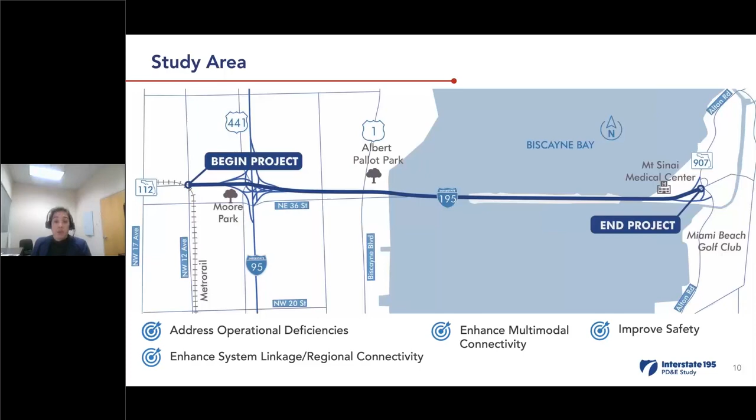In this slide, we showcase the study area. Our project runs along the Causeway, beginning on the west side at Northwest 12th Avenue, which belongs to the City of Miami, along I-195, ending at Alton Road, which belongs to the City of Miami Beach. In our project, we will be addressing operational deficiencies along the corridor, enhancing system linkage and multimodal and regional connectivity, as well as improving the overall safety of the corridor. Next slide.

So what is a PD&E study? A PD&E study is a project development and environmental study, which is a mix of engineering analysis, environmental analysis, and public involvement activities. This process is used by engineers and planners to determine the best location and conceptual design of the preferred improvements to the roadway. In a project as big as this one, we begin with the planning phase. Our planning phase finished back in 2020, and we began our PD&E study a little later, in June 2022. Moving forward, after the PD&E study, which is scheduled to finish by fall of 2025, we'll move into final design and engineering.

Moving then into the right-of-way acquisition, if it's needed, which most likely will be, moving into construction, and then maintaining the improvements in perpetuity. And there is always opportunities for public engagement throughout the PD&E phase.

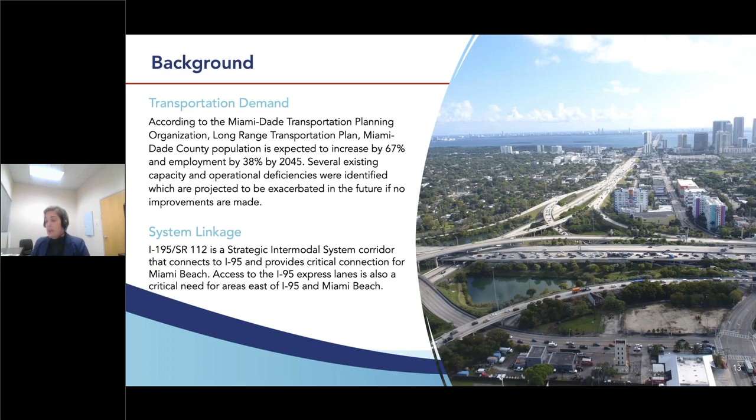As part of the safety analysis, there are several locations that have been identified within the high crash list within the corridor and multiple clusters of accidents. This indicates that there is a safety concern that we need to address.

There is also a lack of bicycle and pedestrian connectivity between both cities, City of Miami and City of Miami Beach, and we are evaluating opportunities to better these connections for the lack of bicycle and pedestrian infrastructure.

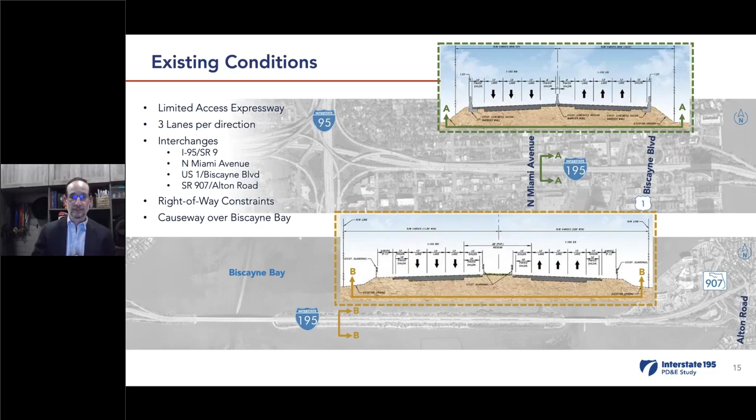Discussing a little bit further the safety issue that Yvette mentioned, within the analysis years of 2017 to 2021, there were almost 8,000 total crashes within our project study area, with a significant number of crashes concentrated within the I-95 interchange, as well as the US 1 interchange and Alton Road.

We've also highlighted the number of pedestrian and bicycle crashes associated along the corridor, as well as the overall fatal crashes that have taken place during that time. So from a vehicular standpoint, a lot of the safety issues stem from the poor operating conditions.

And then, of course, we need to look at all the ramp termini and those access points in terms of how we can better improve the pedestrian and bicycle safety associated with those locations.

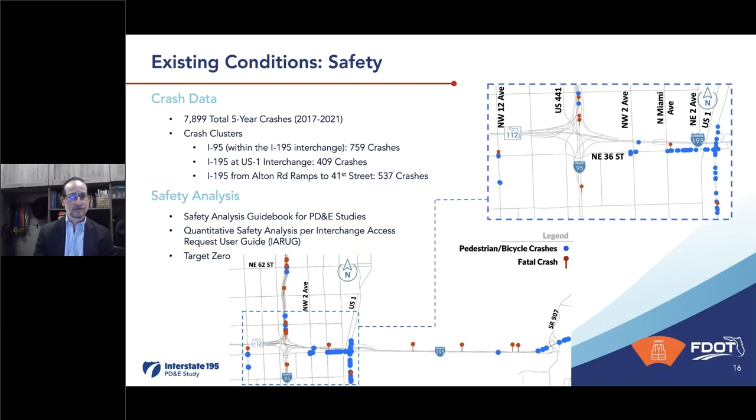From a traffic standpoint, currently there is already a high demand associated with this facility and poor operating conditions at a number of the interchanges. To help us detail this information and to help us in our analysis, we performed an extensive traffic data collection effort during the fall and winter of 2022.

Taking all that information and using Miami-Dade County's forecasting models to develop our design year traffic for the year 2050. That effort is currently ongoing, and we are looking in detail at not only the existing conditions, but what that looks like in the future, in the year 2050, without any improvements, as well as with some of the proposed build improvements that we're going to be discussing.

And we're going to look not only at the interstate and the associated interchanges, but also at the surface street operations. We understand that a lot of the issues that currently plague I-195 stem from the poor operating conditions on the surface street and how that then backs up to the interstate. So all that is part of our analysis as well.

And that will all be documented into our systems interchange modification report, which is a very comprehensive traffic document that is reviewed both locally in Tallahassee and also by the Federal Highway Administration.

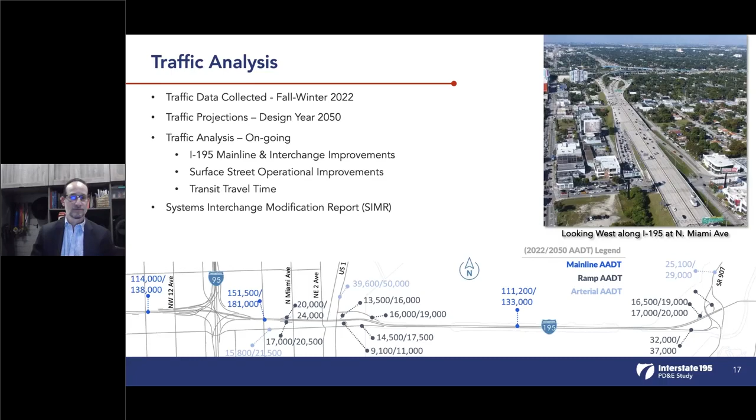As part of the process in a PD&E, once you understand what the needs are, then you look to develop alternatives to effectively address those needs. And the first step in that process is we always maintain a no build, and that is a scenario where no improvement takes place, and it really serves as a baseline by which we compare all of our build alternatives against. We also build into all of our alternatives what's called the Transportation Systems Management and Operations, or TSM&O.

These are options that include ITS, which is Intelligent Transportation Systems, and any neat technology that can be applied to the corridor to help improve the efficiency of the existing corridor without large capital expenditures. Then we also look at major build alternatives in order to adequately address the current and forecasted safety and traffic needs associated with the corridor.

We are looking at a number of build alternatives that have some system-wide implications, primarily being the need to connect the express lanes with I-195. Currently, there is no access from I-195 to the existing express lanes on I-95. This project looks to provide that connection to facilitate residents not only of this area of Miami, but of Miami Beach to have access to the express lanes.

We're also going to look at interchange improvements, not only with I-95, but at all the surface interchanges that I previously mentioned, Miami Avenue, Biscayne Boulevard, and Alton Road. We're going to look at the surface streets and see how some of these key intersections in and around the interstate can be improved. So we'll look to really provide one comprehensive solution for the corridor, and the need to look at multimodal enhancements. How can we partner with Miami-Dade County to make sure that we can help them deliver on their vision of transit for this corridor?

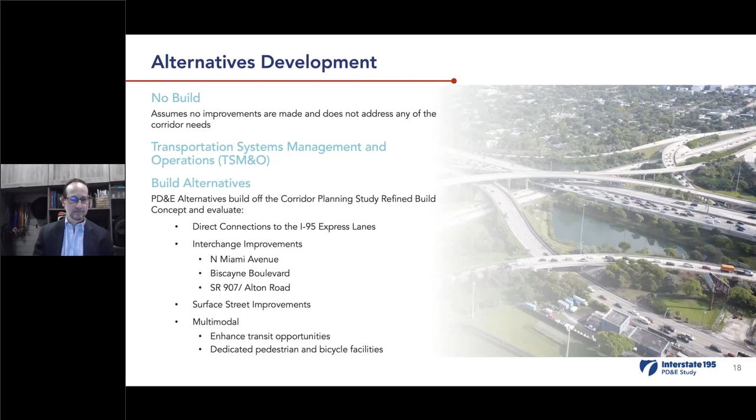There is a process to how we end up with our recommendation. And like I said, we start with these different levels of alternatives, the no build, the TSM&O, and these major build alternatives. We then develop conceptual alternatives in which we look at both system-wide concepts, such as the express lane connectivity, the transit enhancements, and the multimodal enhancements. And then we look at interchange-specific concepts to see what are the best alternatives that can be looked at for each of these specific locations.

We then combine those into what we call these system alternatives. And today we're going to be presenting two system-wide alternatives, Alternative 1 and Alternative 2, which Stefan will shortly go into greater detail on. Once we have our public meetings, this virtual meeting and then the in-person meeting, and take all of the input that we get from the community, we go back, we further our analysis, we take that feedback to refine our alternatives, and then we move forward with the preferred alternative that is presented at the public hearing before the culmination of the project.

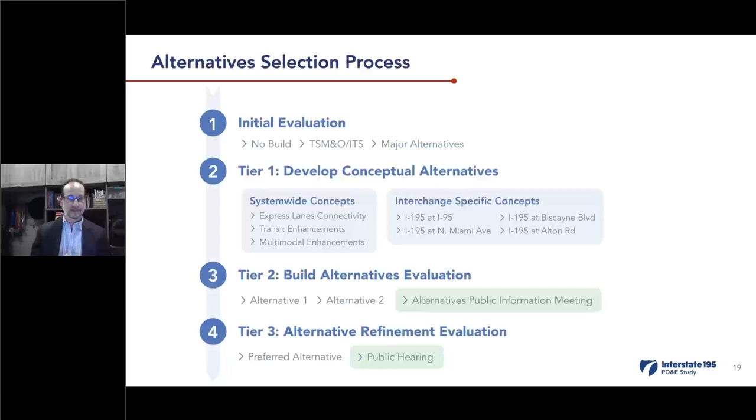In order to assist us to analyze the project and develop alternatives to address the needs that have been stated, we've segmented the project into 4 focus areas. Focus area number 1 is the area in and around the I-95, I-195 interchange. Focus area number 2, from the interchange to Biscayne Bay, which is the area with the Miami Avenue and Biscayne Boulevard ramps, within the city of Miami.

Then focus area number 3, which is the Causeway, which is the most delicate and sensitive from an environmental standpoint. And then focus area 4, the eastern terminus at Miami Beach, making sure of the connections to the beach, and we take into account improvements to make sure that the transition from the interstate to the surface street system is adequately handled.

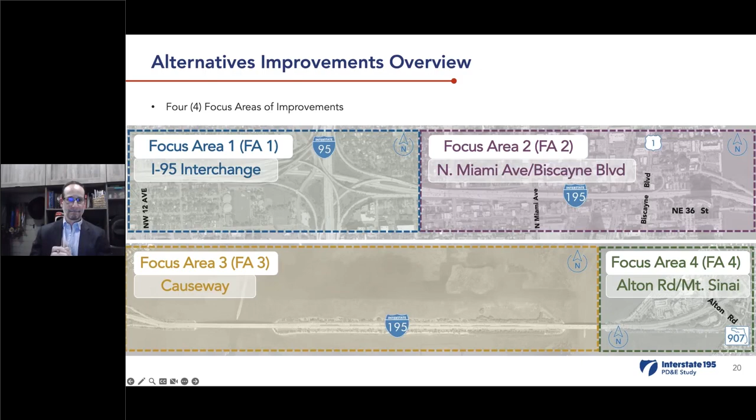Thank you, Robert. Beginning with focus areas 1 and 2, looking at an overall overview of the two alternatives currently being considered. You have alternative 1 on top and alternative 2 on the bottom. One of the key components for these two alternatives is the connection of I-195 with the I-95 express lanes, shown as the large black line cutting across the aerial image.

For alternative 1, a viaduct upper level is introduced along 195, which connects to the express lanes of I-95. In alternative 2, this access is further enhanced by also providing access to and from the express lanes with the local interchanges of North Miami Avenue and US 1.

Moving a little to the east, looking at the North Miami Avenue interchange under alternative 1: North Miami Avenue is upgraded from its current partial interchange, which only includes ramps to and from the west, to a full interchange, adding the eastern ramps—the westbound off-ramp and eastbound on-ramp. This full interchange also introduces a collector-distributor system between North Miami Avenue and US 1.

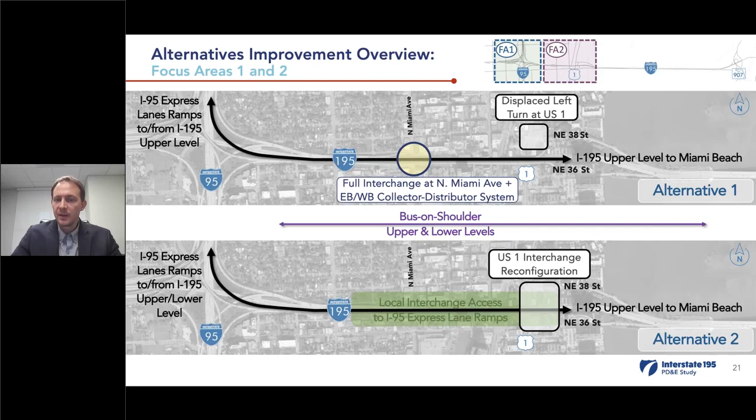Under alternative 2, North Miami Avenue remains a partial interchange. Moving to the Biscayne US 1 interchange under alternative 1, a displaced left turn intersection configuration is proposed for the US 1 and Northeast 38th Street intersection—we'll see more details on that shortly. Under alternative 2, the US 1 interchange is completely reconfigured.

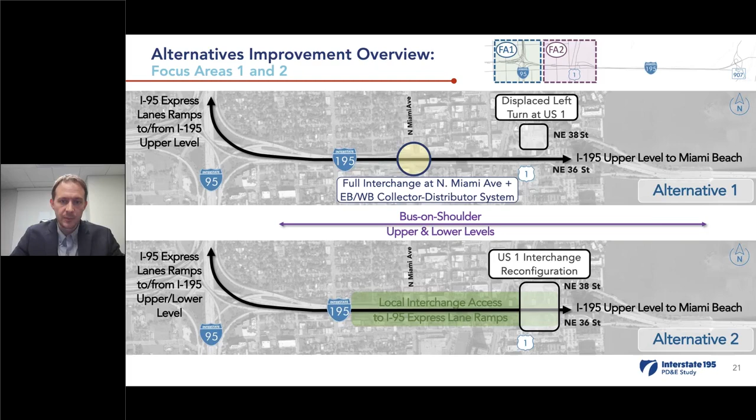Under both alternatives, bus on shoulder is proposed on both the upper and lower levels, and we'll see additional information on the next slide.

Looking at some details for focus area 1, the interchange with I-95 and its improvements. As mentioned, you can see on the typical section top right the two levels, with the viaduct upper level I-195 section. The key improvements under alternative 1 are providing ramp connections from this upper level system to I-95, connecting both to the express lanes and the general use lanes. In addition, bus on shoulder operations are introduced within this focus area.

They begin just east of the interchange and just west of Northwest 3rd Avenue. There's also an additional ramp, shown in the bottom right corner, providing access to the upper level for traffic coming from southbound I-95 and from northbound I-95 to the upper level. This allows traffic to bypass the interchanges of North Miami Avenue and US 1, continuing straight to the Causeway and Miami Beach.

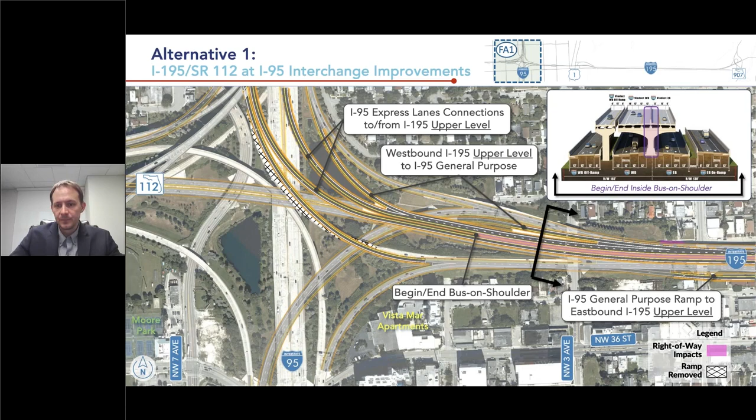Looking at alternative 2 for the same area, there are a few more ramps compared to the previous image, in order to provide additional connection and access from the express lane system to North Miami Avenue and US 1. As you can see, there are a number of ramps provided from the upper level and express lanes.

This also includes the beginning and end of the bus on shoulder, similar to alternative 1. All of the ramp movements from the lower level to the upper level occur within this interchange area, unlike the previous alternative, which had a ramp a little further east as previously described.

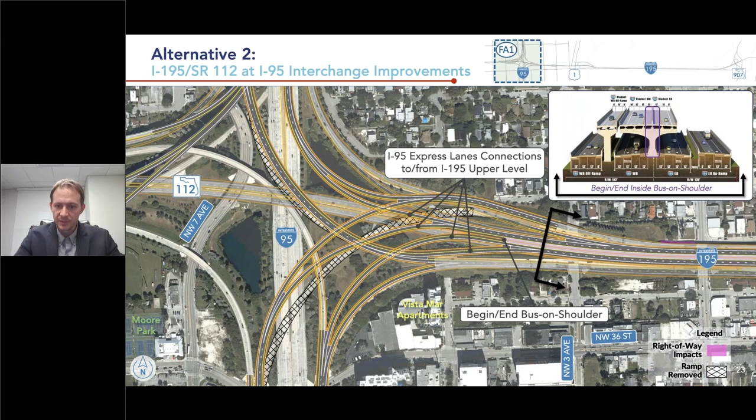Moving into North Miami Avenue for alternative 1 and the US 1 improvements. This alternative includes the full interchange with North Miami Avenue, adding the westbound off-ramp and eastbound on-ramp. To provide these ramps, a collector-distributor system is introduced between the interchanges of North Miami Avenue and US 1.

These collector and distributor systems process the traffic coming up—for example, westbound from US 1—and traffic also wanting to get off westbound at the new ramp at North Miami Avenue, allowing those lane changes and movements to occur outside of the main line where speeds are lower. This separates potential speed differentials, a key safety element for introducing the new ramps at North Miami Avenue. In addition, the US 1 interchange is improved by implementing a displaced left turn intersection, shown in the detail on the right side of the screen.

Beginning with the image furthest to the right, that shows the entire picture of the displaced left turn movement. It consists of taking the southbound left turn movements, crossing them over to the east side of Biscayne Boulevard so that they can then access the westbound on-ramp, operating concurrently with northbound and southbound traffic and saving on overall signal phasing time. So you have a detail here of that crossover intersection, which is further north around 42nd Street.

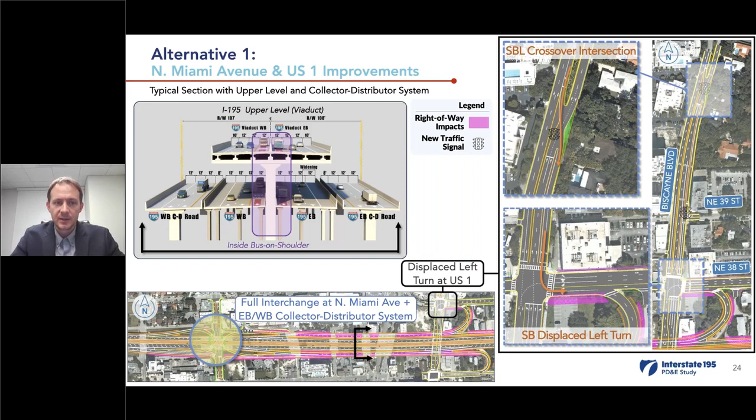As previously mentioned in the overview, the North Miami Avenue intersection remains as its existing partial interchange with only the ramps to and from the west. However, US 1 is reconfigured under alternative 2, beginning with the top left here of the slide, the new southbound Biscayne Boulevard direct ramp to westbound I-195 lower level. What this ramp does is it removes the significant southbound left traffic from the intersection with Northeast 38th Street and eliminates that conflict both operationally and safety, and from a safety and overall just high conflict of vehicles between northbound and southbound lefts.

The existing loop ramp from Northeast 38th Street is removed and relocated further east. This is in order to provide enough separation for the two ramps to be able to operate and still service the northbound to westbound movement. So as you can see, this is shifted further to the east.

In the bottom left corner, there's a loop ramp introduced from Northeast 36th Street to eastbound I-195. With this new ramp, the existing loop ramp is eliminated, again due to spacing of ramps along 195, and the eastbound off ramp to US 1 is instead introduced via what's called a Texas U-turn ramp. You can see in baby blue over to the right.

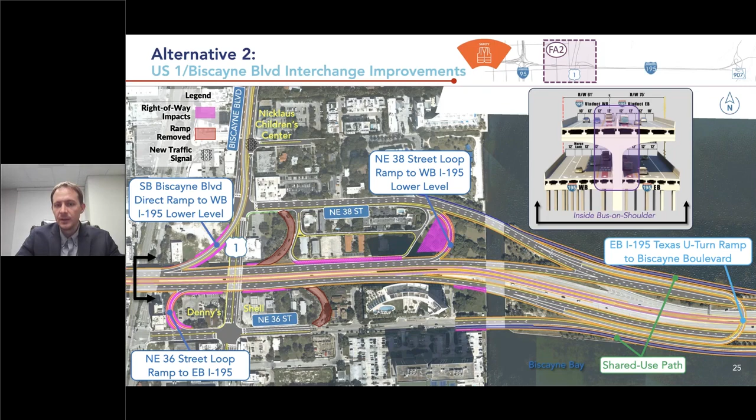Moving to the eastern side of the causeway into focus area 4, we have some safety improvements related to the westbound on-ramps. A lot of speed differentials exist today between traffic coming from Alton Road and traffic coming from 41st Street, where 41st Street has a little bit more time to begin speeding up compared to Alton Road, which is coming in at a slower speed and performing merge maneuvers. So this separates those two traffic flows to reduce the amount of sideswipe instances and crashes that have historically occurred.

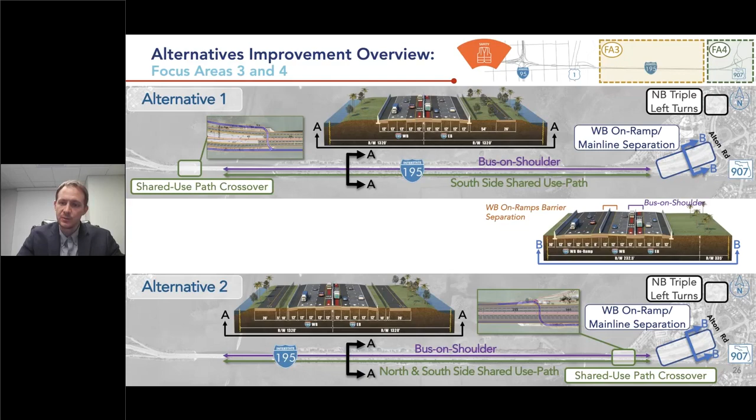In addition, additional capacity is provided at the entrance to Mount Sinai in order to reduce backups and improve the overall capacity and operations between the triple left turn, northbound left turn movements and southbound through movements at that intersection of Alton Road and 43rd Street, which is the entrance to Mount Sinai. Next slide.

With all these alternatives across the entirety of the project comes a lot of engineering analysis. Drainage is extremely important along this project as stormwater runoff flows into the Biscayne Bay Aquatic Preserve, which is an outstanding Florida water. There are a number of drainage basins within the project area, and overall the water quality treatment capacity is available within the existing right-of-way.

The team has prepared a high water memorandum and has been discussing what that high water level should be in terms of sea level rise, to take into account resiliency initiatives and to coordinate that with other agencies.

From a structures perspective, throughout the alternatives there are a number of new structures introduced, including the upper level viaduct and new interchange ramps. Depending on which alternative, you have anywhere from 10 to 20 new interchange ramps, as well as widening of the causeway bridges. There is a difference in right-of-way impacts between the two alternatives, one key contributor being the collector distributor system between North Miami Avenue and US 1.

As we develop these improvements, we also look at what are some of the short-term and long-term improvements and opportunities that can perhaps be phased.

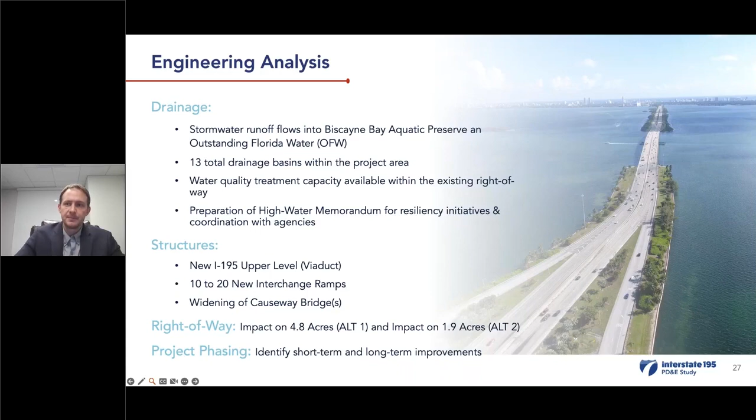And with that, I will hand it to Kaylin, our environmental scientist. Thank you, Stefan.

As Stefan and Robert mentioned, there are several sensitive environmental features in parts of this project area that are incredibly sensitive. As part of the environmental analysis conducted throughout the alternative refinement process, we have to consider and document them in several different technical reports that we prepare.

Notably, we do have essential fish habitat present. Our regional fishery council acknowledges several different types of habitats that could be EFH, or essential fish habitat. Notably, we have both seagrass and corals present within the project area.

We conducted preliminary benthic surveys in summer of 2022 based on the corridor planning study alternatives that Robert mentioned before, from the previous phases of this project before we began our study. We went out to generally confirm seagrass, so we do anticipate direct impacts to seagrass as a result of this project.

We also identified some small corals, but those would be easily relocated prior to construction. We will be going back out again this upcoming seagrass monitoring season, once we have refined alternatives, to get more detailed information about those impacts.

We also have several different considerations for wildlife and their habitat, as there are several state-listed and federally-listed species present within this project area. The Florida bonneted bat is one species we may have to conduct specialized surveys for, depending on the alternative that's refined.

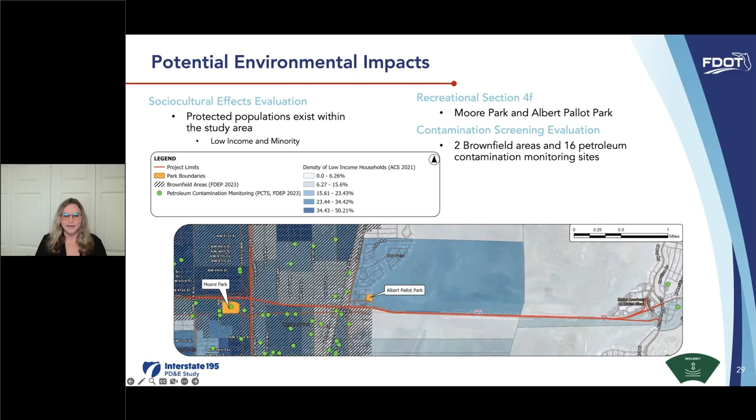Finally, this project area is very sensitive and provides a lot of opportunities for resiliency, and several different organizations have been studying this area, trying to come up with potential pilot projects or resiliency initiatives. We've been tracking those throughout this study to see what types of alternatives and pilot projects are being developed. We've also been coordinating with local agency groups, such as our local resiliency offices, to see if there's a way to fit some of these project ideas within the footprint of the alternative that's ultimately refined and selected.

There's also the Biscayne Bay Watershed Management Board and Task Force, which is working on a living shoreline guidance document, so we'll be coordinating with them to see what they've been developing.

The City of Miami Beach conducted a living shoreline viability assessment a few years ago and identified the seawall at the eastern portion of our project area as suitable and preferred due to its length and not having any neighbors or conflicts nearby. They selected this as suitable for a living shoreline or seawall design, with also a small area of potential mangrove planting that's actually exposed at low tide.

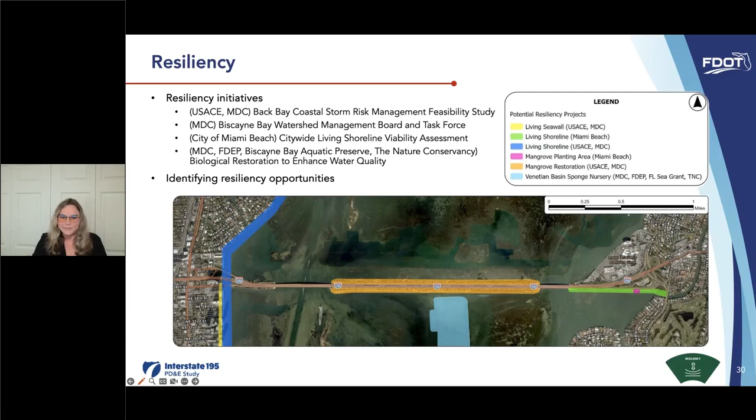And for that, I'll hand it back to Stefan for the rest of the physical environmental.

Along the project corridor, we have a number of noise sensitive areas. This varies from high-rise residential to low density residential, such as single family homes. We also have mixed use residential commercial properties, as well as recreational resources. Within the project area, there are 3 existing noise barriers, all on the west side of the project, shown there as the blue lines. So 2 of them near I-95 within that interchange, and then over on the eastern side, the south side of 195, just before Biscayne Bay, just west of there.

Our next steps are going to include performing traffic noise monitoring and then evaluating potential noise impacts from the proposed improvements, to determine if any additional noise abatement is warranted throughout the project corridor, any potential impacts to the existing noise barriers that exist there today, and identifying properties along the project corridor that may be sensitive to construction and noise vibration impacts, such as the Mount Sinai Medical Center.

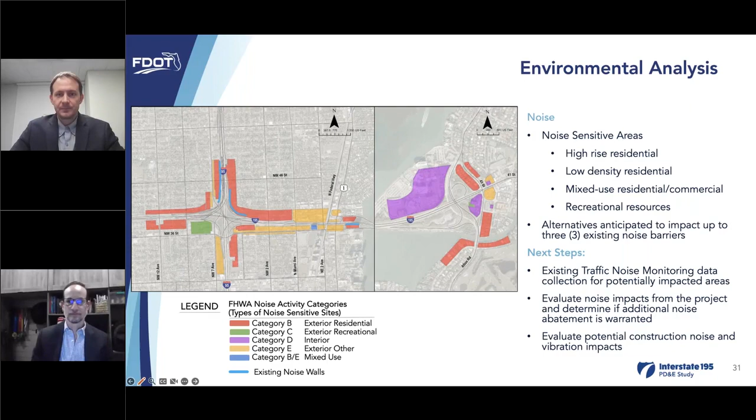And I'll hand it back off to Robert and us for the public involvement.

On a project of this magnitude, the public outreach and public feedback is very important to the department and to us, to not only get the word out, but to really help us refine the concepts that are being developed.

This meeting tonight is just part of an ongoing process that started with the initial kickoff meeting of the project in February of 2023, with a formal alternatives public information meeting tonight and on the 28th, and culminating in the public hearing in the first quarter of 2025.

However, those are just some of the major public meetings. There are a number of past, ongoing, and future coordination efforts with the City of Miami and Miami Beach, with Miami-Dade County. We just recently presented to a number of the TPO subcommittees during the month of February, including the Bicycle and Pedestrian Advisory Committee, the Transportation Planning Technical Committee, the Transportation Aesthetics Review Committee, and the Citizens Transportation Advisory Committee.

We also have two groups of stakeholders that we've put together to help us put the word out to the community in terms of this project and get as much engagement and feedback as possible. We have a project advisory team that has met twice, back in November of 2022 and recently on February 15th. We also have a community advisory group that's met 2 times, most recently last week on the 22nd. Again, this is just one point in time, but we're going to continue these conversations as we take all the feedback we've been receiving, refine our alternatives, and continue engaging the public throughout the duration of the project.

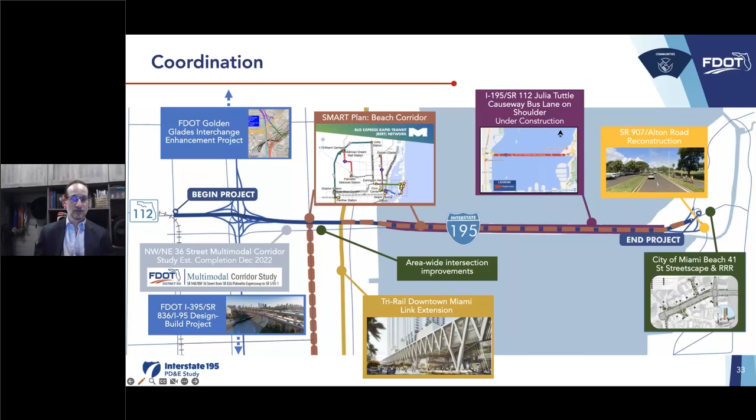That coordination involves a number of other agencies, including other projects within the Department of Transportation. There's a lot going on in this area, both present and future. You have the upcoming FDOT Golden Glades Interchange Enhancement Project, the I-395 Signature Bridge project to the south, the Bus on Shoulders lane along the Causeway under construction, and future plans for the north-south line of the beach corridor along Miami Avenue, with a number of improvements on Alton Road. We understand this project needs to work in concert with our partners to come up with an overall solution that effectively addresses the needs of the community.

From a schedule standpoint, our project manager Yvette went over the overall study timeline for an FDOT project, from planning to construction. Right now we're in the PD&E process that started in June 2022, where we had our agency kickoff meetings, and now we're in one of the busiest times in terms of public outreach. We've developed some initial alternatives, and now it's about getting the word out and getting as much feedback as we can from the community. We're here at the alternatives public meeting. We'll take all the feedback, perform additional environmental and engineering analysis, refine our alternatives, and move forward to a public hearing, likely at the beginning of 2025, with the study culminating currently planned for the fall of 2025.

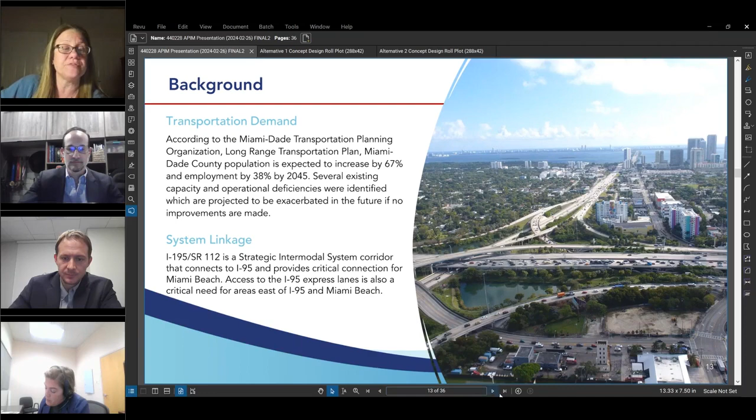So I'm going to move on now to Sebastian Ruiz, who has left, but I think it's important to address this. He would like both the engineers and Commissioner Higgins to be aware that he is concerned that the double decking might make seagrass impacts worse compared to a wider causeway. So I'm wondering if our environmental expert, Caitlin Hill, would like to address that specific question. And I can read it again, Caitlin, if you want me to.

That's okay, I think I got it, though. Of course, please feel free to correct me if I get it wrong. But actually, in this case for this project, the touchdown for the viaduct is before the crossing of the bay. So there would be less impacts than widening, because additional widening might shade seagrass underneath it. This project, because the viaduct touches down before, wouldn't actually have additional widening or seagrass impacts as a result of that.

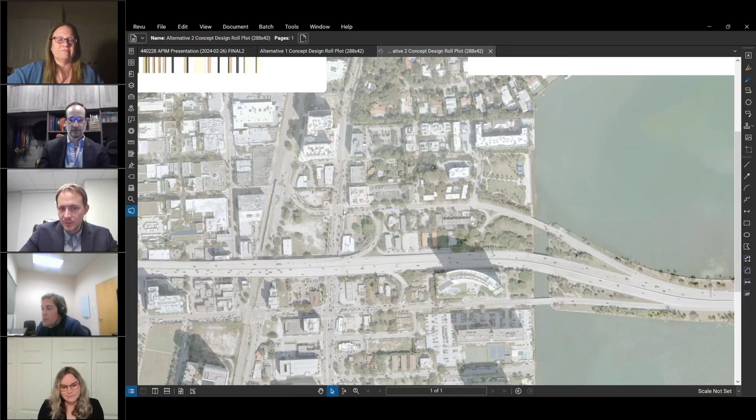So, if you're on the east side here and you're crossing Northeast 38th Street, you don't catch much of a break between southbound left and northbound right traffic and access to the loop ramp. So you're really looking at getting that traffic out, and then seeing how the crosswalks can be improved in terms of visibility, high emphasis crossings, and push button locations that are maybe far out.

A lot of that detail, though, when we do get to the surface street, does come down as you start to refine the alternatives a bit more and really start developing those elements. And those are modifications that we also have to quantify in terms of overall improvement and potential reduction in crashes from different improvement elements.

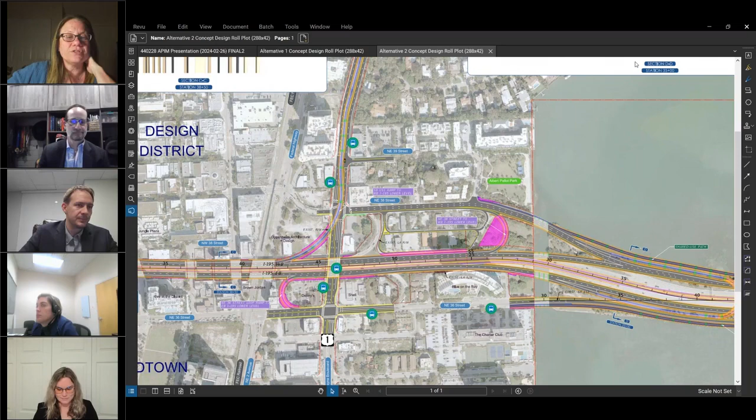Mr. Goltanoff's question is, has a cost benefit been conducted to determine the number of people anticipated to use the express lane connections from Miami Beach, and would their user fee tolls cover the costs of construction? I can begin to answer that the user fee tolls typically do not cover the cost of construction. The user fee tolls are collected by the state and reinvested into the system.

I'm not sure that we would be discussing yet the number of people that would use the express lane connections. I can tell you that we have heard very positive feedback from Mount Sinai Medical Center, of course, and several other representatives and organizations in this area who, if you know the history of the express lanes on I-95, this was actually a big bone of contention for this community, that they did not have access to the express lanes here. So that's where that originally debuts from, and you heard the commissioner address that a little bit.

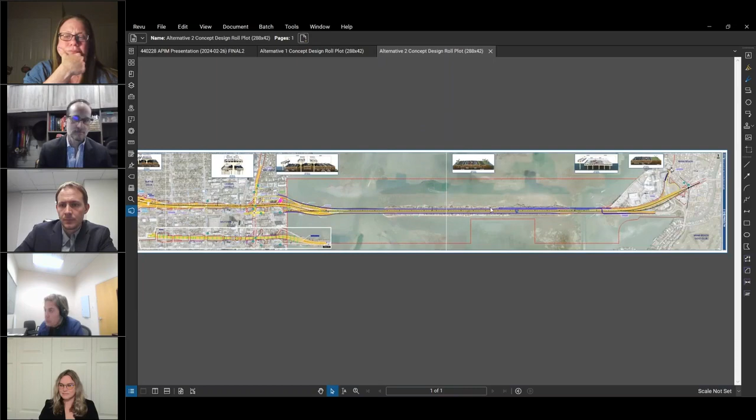With respect to Mount Sinai, I sent you that email. We didn't necessarily have to go over it right now, but last time we talked about whether there would be a direct connection between the proposed bus lanes on the shoulder and the Mount Sinai Medical Center, seeing that it is one of the larger employers on Miami Beach. And I know the answer was no.

I did want to circle back with you, though, if there's any data that you perhaps have on modes that are used by employers and by visitors and patients, what the times of day are, not just the peak AM or PM, but since it's a 24-hour facility, perhaps there are other non-traditional times as well. Just trying to get an understanding of how this information and their expansion, whether or not maybe they have internal employment surveys on transportation methods, and how this could all be factored into this particular project.

Robert, I think again, before you go ahead - you think it's helpful? No, I do, because every time we answer one of these questions, I hope it triggers other people to think about follow-up questions or things they maybe didn't know about the constraints we're dealing with. But I just want to clarify, I think the question originally was if we could provide the connection directly into Mount Sinai. And typically we do not create - it's a much more formal answer than what I'm about to give you.

The engineers can correct me, and they're probably cringing at me trying to explain it. But in a nutshell, we are not able to typically go straight into what we would consider private property. However, we are working very closely with Mount Sinai on their master plan, and additionally with the Department of Transportation and Public Works. We actually have received a ton of their data and information, not just from their master plan, but specifically how their employees are getting to and from work. One of the things that was really interesting was also the diversion of ambulances and rescue from Jackson to Mount Sinai, so that was a really additional set of information that we received.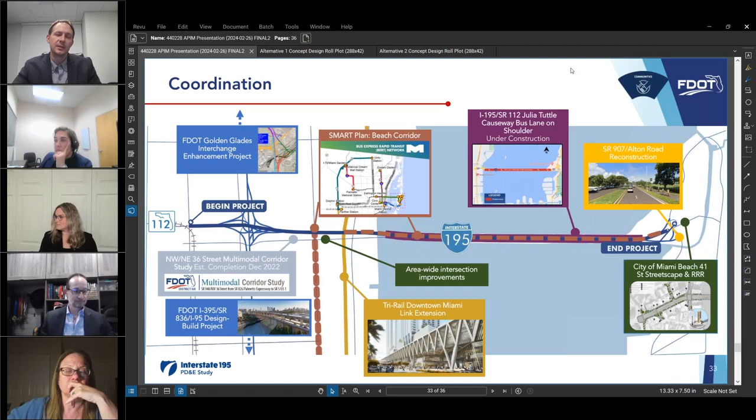Yeah, and I just pulled up, I think, this coordination slide. I think it's important to show that we're looking at all of these potential connections and where they're coming in, and what conflicts or opportunities are occurring with it throughout the project area.

And Mr. Goldstein, just to clarify, I don't know if there's anybody from a Miami-Dade County standpoint, but from a heavy rail standpoint, 395 is currently the corridor, and there's no consideration at this point or any future plans for anything along the 195 corridor. I understand plans change, so I don't want to say there's definitely no plan. But given the extremely narrow or restricted right-of-way in the City of Miami spot, it's going to be hard to leave some type of envelope for a future connection, even within what's out there today.

Again, as we discussed earlier, I think that's a different issue over the causeway. For a significant portion of this project, there is that opportunity. But again, there are north-south corridors, as Stefan mentioned, looking along Miami Avenue, and what that can look like from a station standpoint to then get across the causeway.

That's definitely beyond the scope of this project, but I think there are opportunities, should the vision change, to try to accommodate that in the future.

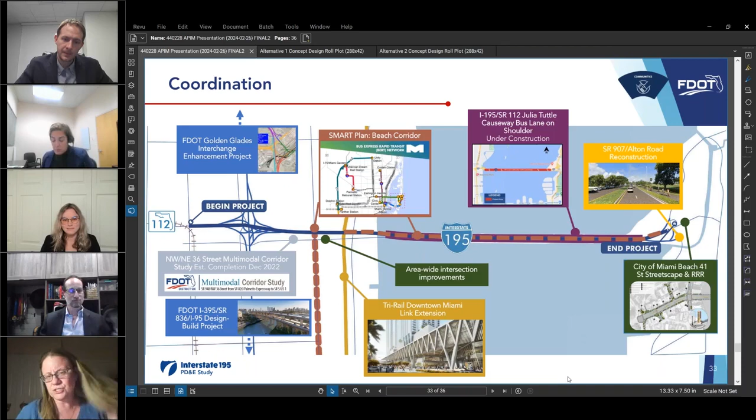And I think the other thing to add is that, as Commissioner Higgins mentioned, there's a lot of moving parts right now, not just on the SMART plan, but on all the applications that have been submitted to the federal government for the expansion of Metro Rail, Metro Mover, and our bus system in general. So we will continue to get that information on a very regular basis from both DTPW and the TPO, and as a result we will work together very closely on whatever plans.

We know that they're constantly looking at improving their system. So as we get any additional information or funding, like Commissioner Higgins mentioned, the Northeast Corridor is now advancing. Obviously, that was a great development.